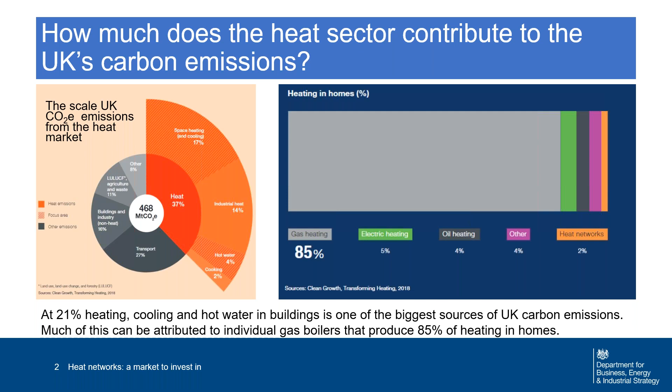To give some broader context on the importance of heat networks for decarbonisation and net zero: cooling and hot water in buildings is one of the larger contributors to our national CO2 emissions. Heat networks at the moment are around 2% of the market. We very much envisage a significant scale of growth in the heat network sector to help the UK decarbonise its heating and meet our net zero target.

We've been clear that meeting net zero will require almost entire decarbonisation of the UK's heating sector, and we very much see heat networks as an integral part of that. We've got some indicators here of the scale of growth we envisage in the heat network sector, which will be necessary to meet our net zero target cost effectively.

There are a number of published documents, including our previous Clean Growth Strategy, where we said heat networks could meet between 17 and 24% of UK heat demand by 2050. We also agree with the scale of ambition of the Committee on Climate Change, who pointed to similar numbers. It's an incredibly important sector, one we know needs to grow very quickly, and the government is committed to supporting that with policies in a number of areas.

It's worth explaining briefly how we see heat networks contributing to net zero. Heat networks are, as we often say, technology agnostic. They can be equipped with a number of different low carbon technologies, and that flexibility is one of their major strengths, whether that be large solar thermal plants, large scale heat pumps, or waste heat recovery. There's any number of low carbon heat solutions they can make use of.

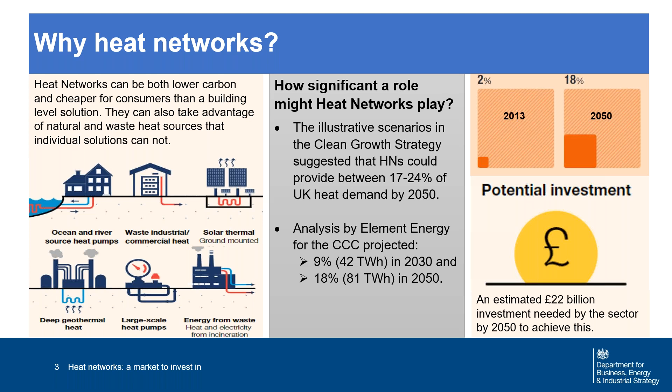They are particularly cost effective for dense urban areas where there is a large scale of heat demand, and that's where we primarily see them being deployed. The flexibility they offer enables deployment in many different and varied locations across the UK. In order to meet that scale of ambition, we are committed to supportive policy in a number of areas, and I thought we might run through a number of those.

Since 2013, government has had the Heat Network Delivery Unit. This is a team of specialists within BEIS who provide advice and early stage grant funding to local authority sponsored projects in England and Wales. They have been behind the development of many important projects over the years that support the growth of the heat network sector.

We've also got heat metering and billing regulations, which further bolstered and matured the sector. So these require minimum standards on how customers should be metered and billed for their heat consumption, and also started government's formal data collection of the heat network sector. So if you're a heat network, you are required to report back to the Office for Product Safety and Standards for your location and some very basic details, which enables us to get an overview of the sector.

In 2015, it was announced in a spending review that the government is going to be giving £320 million of capital funding to the heat network sector, and that capital investment project is very much underway. It launched in 2018 and has already committed tens of millions of pounds to the sector, and some groundbreaking projects, particularly looking at mine water projects in the northeast, where the Heat Network Investment Project is driving the sector to develop new and exciting heat sources.

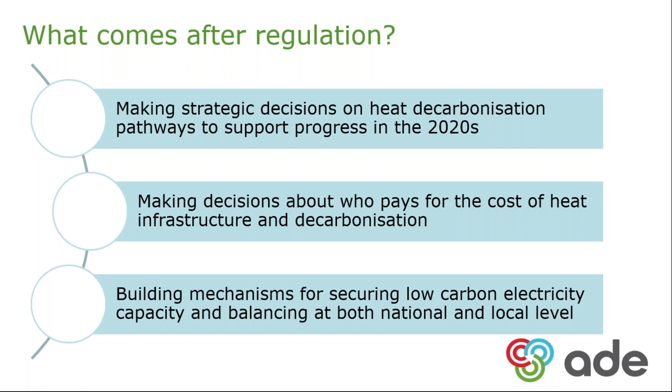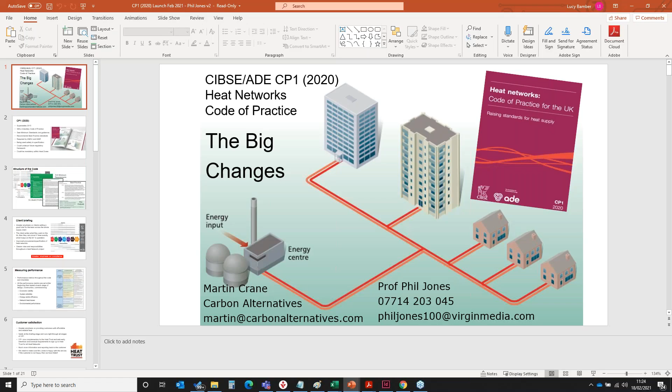We're now going to move on to our third and fourth presenters, and I'm very grateful that this morning we've got two of those who did a huge amount of the work on the Code of Practice. Phil Jones is going to start off the presentation, and he's going to be joined by Martin Crane.

And I think on behalf of everyone at CIBSE, I would like to say a huge thank you to Phil and Martin for the amount of work that they put in, whilst at the same time recognising that if you look at the front of the Code of Practice, you'll see that they were part of a very large team of people who contributed and reviewed and commented on the code. And it really has been a huge collaborative effort. So thank you to all concerned, but particularly to Phil and Martin. Phil and Martin are going to run us through the major changes in the code.

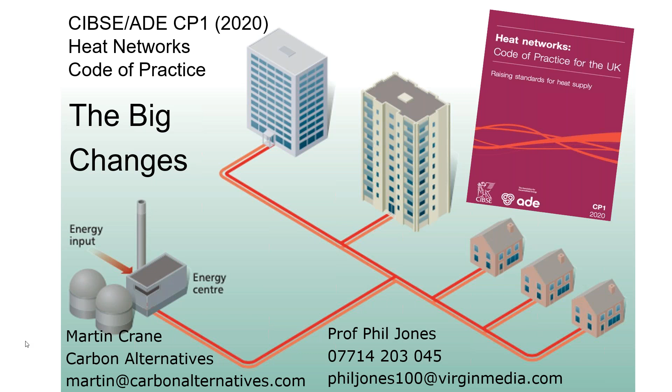Splendid. So we first produced CP1 in 2015, and the 2020 version is still a voluntary code of practice. It sets minimum standards. It is not guidance. I think it has a status above guidance documents, but it also recommends not just minimum standards, but best practice standards to go beyond the minimum. It is a requirement under all HNDU and HNIP, Heat Network Investment Project, projects.

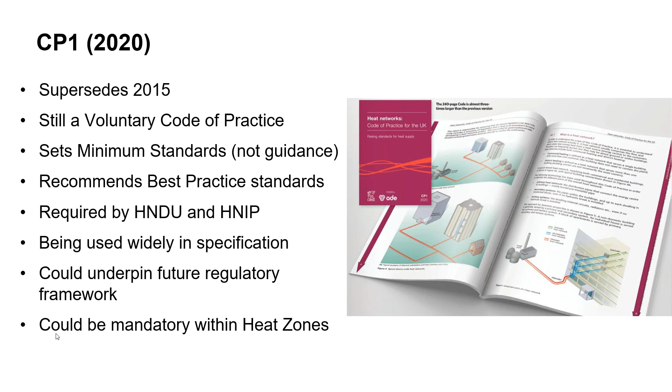It's technical, but it is very now process driven and is very much being used as a specification by developers saying, I want a heat network to meet CP1. So it's actually changing the whole market. I'm hoping it will underpin the future regulatory framework that Aaron and Caroline were talking about, and it could even be mandatory within the heat zones that are being worked up under that regulatory framework. And you see the sort of style of document on the right hand side. Can I click next slide?

So the structure of the code, it is very structured. Going from the left-hand side, there are 7 stages, and some of you may be familiar with the arrow diagram from 2015. 7 stages, essentially 7 big chapters. Each chapter has a series of objectives, and you can see in the middle where it says feasibility, the feasibility stage has 13 objectives, and each objective looks like objective 2.4 in the middle there, and you can see 2.41 is a minimum requirement. There are 540 minimum requirements in 53 objectives across 7 stages.

But we're not just setting minimum standards, we're putting forward recommendations for best practice that you can see on the right-hand side. But most importantly, at the end of every objective, there are key outputs. And these are generally reports, diagrams, schematics, hard copy stuff that actually we can record at each stage. And I will come back to the use of those key outputs as we go through.

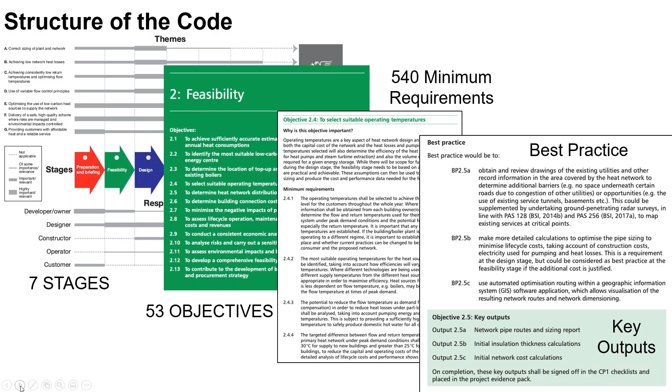One of the great themes that we have put much more emphasis now on is the client setting a really good brief with his advisors, MEP team at the beginning of the project, and they're making sure that what the developer actually wanted gets done, so they can actually write what they want on the tin and then prove it does what it says on the tin in operation. But we have put in place a process which checks, is it doing what it said on the tin at the end of every stage?

These are very long, complex projects. If you leave it to operation, you could end up with a poor heat network, and then it's too late to fix, it's too expensive to fix. And so we're checking at every stage at the very least. Much improved procurement, much clearer roles and responsibilities, and much greater emphasis on compliance. So next slide.

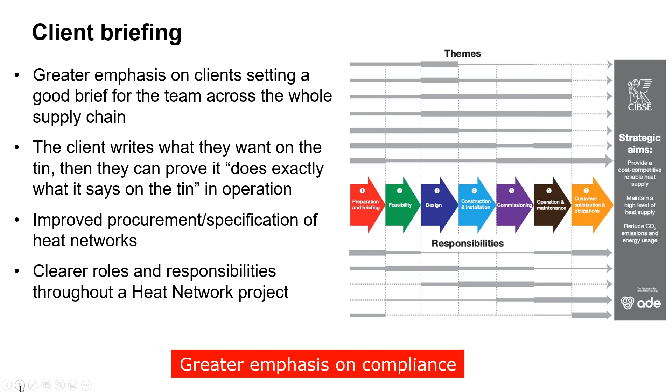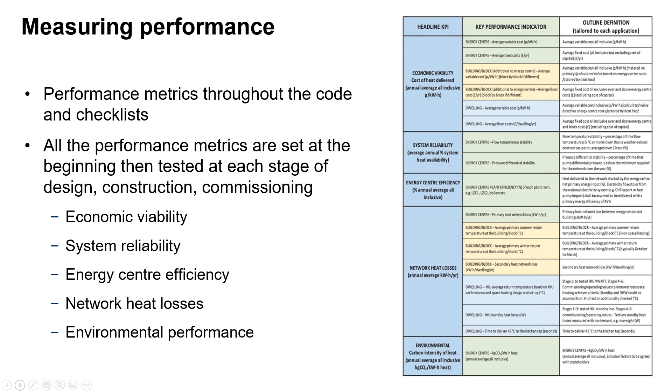The other great theme that we have built into the new CP1 is a much greater emphasis on customer satisfaction. I'll freely admit it wasn't as strong as I would have liked to have seen it in 2015. But this again now starts at the briefing stage and runs right throughout the whole document. And it's very much complementary to the Heat Trust. We work very closely with Heat Trust, and it's not replacing Heat Trust. It sits nicely alongside it, and it sets a very early intention.

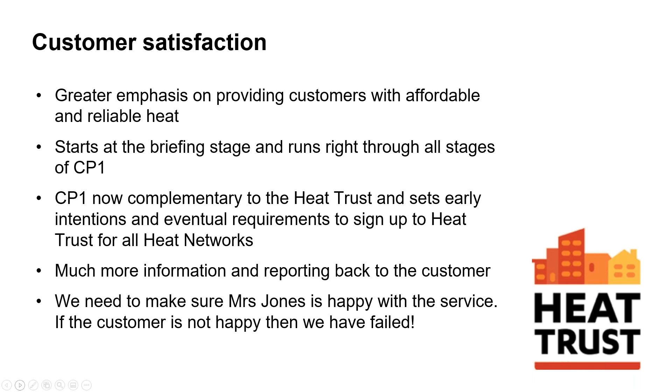It insists a minimum requirement, says, thou shalt, Mr. Developer, set an early intention written down and sent to the Heat Trust that we are going to join up to the Heat Trust. And then at the back end of the process in operation, they would actually sign up to the Heat Trust. So much more emphasis on customer protection, satisfaction, information and reporting back to the customer. And we do need to emphasize, we get too technical about all of this. We get stuck in the weeds of Whitworth threads and things. Actually, we just need to make sure the customer is happy, in particular Mrs. Jones. If Mrs. Jones is not happy, I know about it.

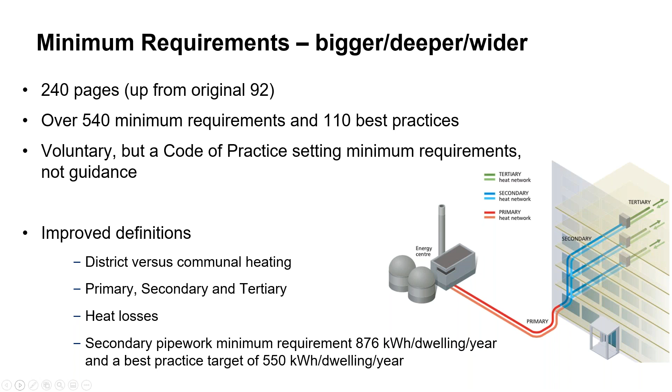And next slide, please. Sorry, I'm pressing my keyboard. Lucy, help. Thank you. Back one, please, if you're in control. No. Back two now. Yes, that's the one. Thank you very much. Sorry, everybody. A little bit of delay on the keyboard and so on.

So we have recognised that we really needed to attack massive oversizing of pipe work and indeed HIUs, and we have now focused CP1 around Danish standard DS439 in terms of diversity and pipe sizing. We also recognise that the DS439 process was being misused in the UK, and thanks to Fairheat for huge work on an appendix in CP1 now, which shows a clear worked example of how you actually pipe size using DS439 to prevent that misuse.

And the other fantastic achievement is BEIS actually put some funding in for translating DS439 into English, so that is now available for the UK market. And we've provided some guidance on space heating diversity. So this is all aimed at getting sizing right, avoiding oversizing.

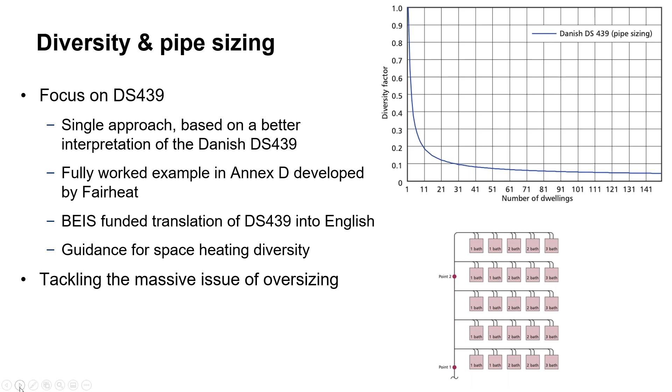Yes, so as well as making everything more efficient, losing less heat, the code includes a bit more on plant sizing of heat pumps and CHP, and trying to drive the sizing of those to be based on the economics. So you actually test the economics of the different sizes of plants and pick the one which gives you the lowest cost of heat.

And as part of that, we're looking at how electricity tariffs vary during the day, day-night tariffs or seasonal time of day tariffs, so that if you're running your CHP plant, you run it when the electricity's export value is high, and when you're running your heat pump, you try and maximize the use when the electricity price is low.

And that's in at the feasibility stage, as it affects the economics, and also in at the feasibility stage because it tends to result in larger thermal stores, which can be a bit of a pain to incorporate. So the earlier you know about that, the better. Next slide, please.

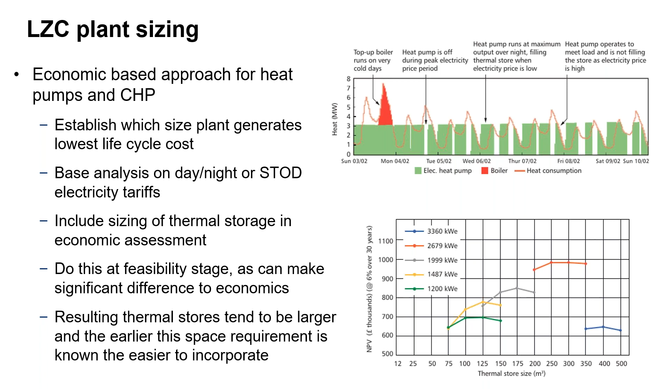Right, thank you. And then trying to reduce the heat losses. So a very big win was, a lot of people worked very hard on getting agreement to be able to lower hot water temperatures from HIUs down to 50 degrees rather than 55. So that means you can try and run systems at lower temperatures in the summer, or if you're all using underfloor heating, perhaps all year round.

We've upped the pipe insulation requirements and tried to squeeze down on the possibility of using bypasses, which just lift our return temperatures. So the code suggests more ways of avoiding the need for bypasses on networks, which is really useful and good stuff. So next slide, please.

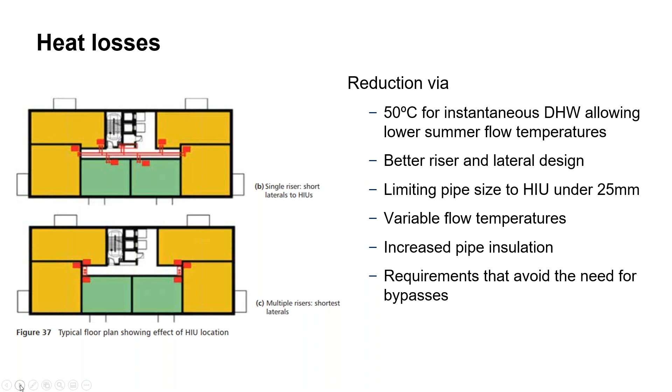And then we've worked hard on looking at commissioning and acceptance testing. So there's an example commissioning process, sort of checklist for HIUs to actually check that the return temperatures you're seeing from that HIU meet what your design intention was. And invariably, there's always been issues with space heating setup.

So the checklist tries to get all the information about the space heating and the setup of the radiator valves on one sheet, so that the person commissioning can check what the design intent was, what the settings were supposed to be set at, and then you actually use the heat meter to check the end result actually works correctly in operation. And also on the checklist are all the other things worth checking, the hot water performance and the temperatures.

But the main errors in the past have been found to be the space heating, and that hopefully is a process. It's only an example process. People should adapt it to suit their situation, but it's trying to bring the design criteria right in front of the person doing the commissioning.

And then past experience shows the commissioning has been imperfect, and so this is where acceptance testing has really generated really good results on getting networks to work really well. And so the code now requires a level of acceptance testing, and it's a risk-based approach. So if you start your acceptance testing early and it's all going well, you can do less, but if it's not going well, you have to do more and more and more. Or the best practice is to do acceptance tests on everything.

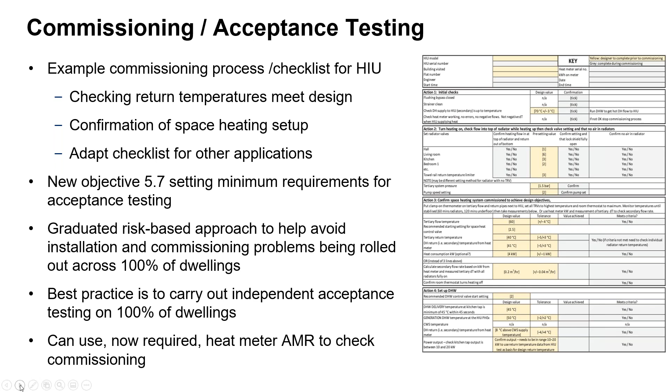The BESA HIU test provides a really good information base which the code uses to set standards in a nice hard and fast way. So we're saying that the VWARTs should be less than 33 degrees, so we can guarantee good performance from the HIU of a known performance. The HIU test also tells us heat losses, which are useful so we can limit those in the code. And the data in the test also helps set those commissioning requirements.

And also on HIUs, the code sets limits on the sizes of HIUs in conventional domestic properties, limiting that to 45 kilowatts. And I think after that, it's back to Phil.

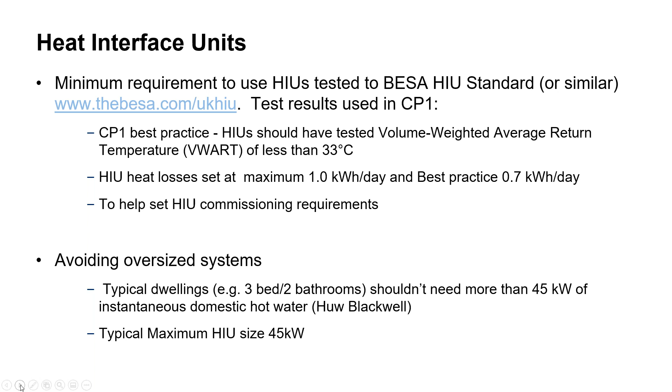Yes, thank you very much, Martin. That's great. And thanks for all your hard work on the code. Well done.

So the other interesting change that relates to acceptance testing is a reduction of instantaneous domestic hot water temperatures from HIUs. We've now set 50 degrees C generated at the heat interface unit, and a service delivery piece for the customer acceptance testing of at least 45 degrees C delivered within 45 seconds, rising to 50 after that. And so that is a clear example of setting acceptance testing levels that are aimed at making sure the customer is happy, comfortable receiving good hot water.

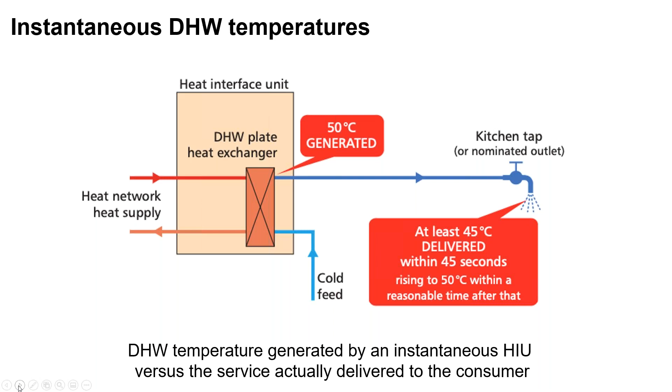This is actually based on work that is going to be published fairly soon by CIBSE in a guidance note, but we've incorporated it already into the code of practice. Next slide, please. So a few of the technical changes, I won't spend a lot of time on this, but we've tried where we can to set maximum heat losses on primary and secondary and on HIUs, as Martin said. We've tried to focus on reduced return water temperatures across the piece.

And we've also tried to set in the minimum requirements of the code a requirement that at design stage you should have the capex model to at least plus or minus 10%. If your capex model is way off, then your internal rate of return and net present value is way off, and you don't know whether you're going to get a return on investment or not.

But the other technical theme running through the code is lots of changes and improvements around metering. You can see on the right hand side, the diagram is telling users where they should actually put metering in a good heat network that follows CP1. Next slide, please.

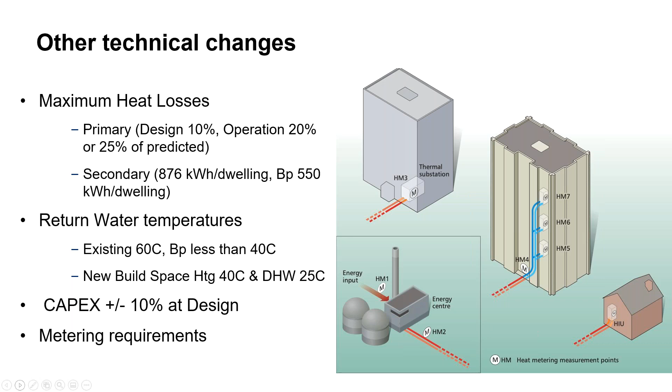So the other big change is somewhat non-technical, it's procedural. We have developed a series of checklists, an evidence pack, and a statement of applicability. And these are not add-ons. They come in an Excel spreadsheet, but they are not add-ons. They're absolutely fundamental to CP1 and to proving that CP1 has been followed. And they provide an audit trail throughout the whole of the design, the whole supply chain.

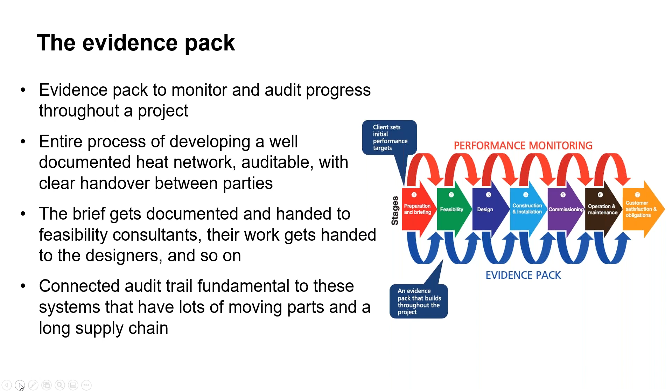Before I go to my last 2 or 3 slides, huge thanks to Paul Woods, our fellow author who's not with us today, and Martin Crane, who is. All of the 50+ experts on the steering committee and the corresponding bits of it. We had over 100 contributors and commentators, and 3,000 comments - yes, 3,000. I've still got them all written on my back as scars. But actually, what that's done is brought huge consensus to the whole piece. Huge shout out to Fairheat, Huw Blackwell and Chris Parslow, because they've had big inputs, but many more. It has been an epic journey, and we have achieved huge consensus, and it is a platform for the future.

But before you dive in, Hal, I've got a couple of other slides, very quick ones. Next slide, please.